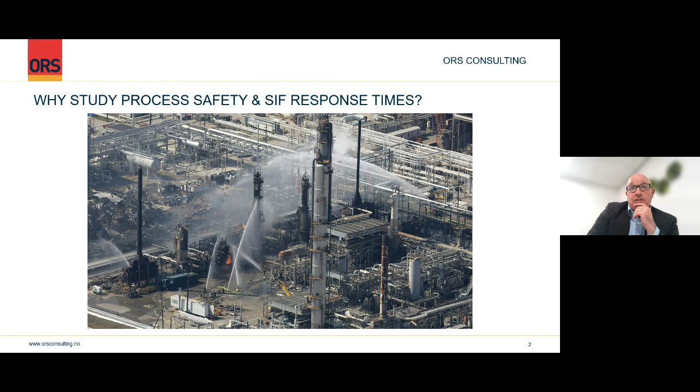They're very complicated. There's lots and lots of different things that happen, very often years before the actual event itself. But at least part of the problem here was there was an issue with the instrumentation, the protective instrumentation that supports those columns. And this is just a schematic representation of one of those distillation columns.

This distillation column's basically got hot vapor being created here in this reboiler. So we get vapor going into the column, and it heads up through the distillation column as a vapor. We've got liquid coming down the column. Sorry, here it's coming here. And there's a condenser here that's condensing some liquid, and the pump's pumping it in. So we've got liquid falling down the column.

And to try and manage the liquid level, we've got a level transmitter here. That's that little LT. And that's trying to tell the operator where the liquid level is sitting. And to try and help with that, there was a high level alarm and a low level alarm on a different device. This was impaired, this wasn't working. And so the operator didn't know where the level was in the column.

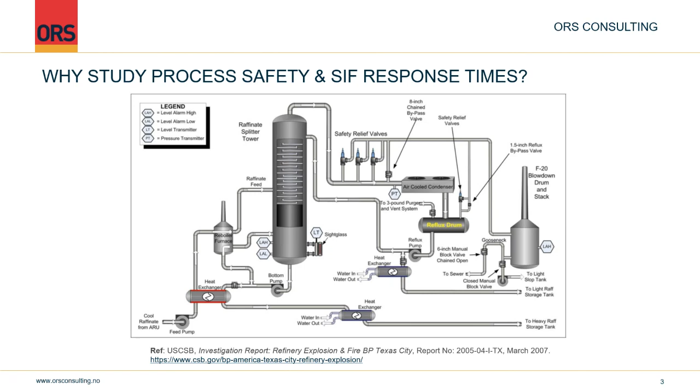This was also not working very well, and they were changing it out prior to the startup, prior to the event happening. And the impairments with these devices, at least in part, meant that the operator did not know where the liquid level was. And so when something else happened during startup, the liquid began to build, and eventually the liquid went right over the top. These relief valves opened, and the liquids were routed to the tall pencil, the big black pencil, and that's where the loss of containment happened.

I got this diagram from the investigation report, and there's also a link there to the CSB site. There's a video, there's the investigation report. There's a lot of extra information there that you could have a read of. I always encourage everybody to have a look at previous events to try and understand them.

So these instrumented systems, and you can see there's a few of them in this plant, and I'm sure in your plants that you're involved with, there's lots of these safety instrumented functions, as they're called. They're protective devices that are trying to stop this liquid overflow. They're trying to stop overpressure. They're trying to stop a low temperature event by detecting it with a transmitter, and then a logic solver trying to get something to take action. So like the pump being switched off, or an isolation valve being closed, or something like that.

And the question we're very often interested in is, how quickly does this equipment need to work? How fast does it need to work? It's obviously no good if the liquid can build in the column over 20 minutes and the fastest that this can all operate is 45 minutes. It'll operate after the hazardous event's occurred. So it's an important question, this. How fast must this equipment respond?

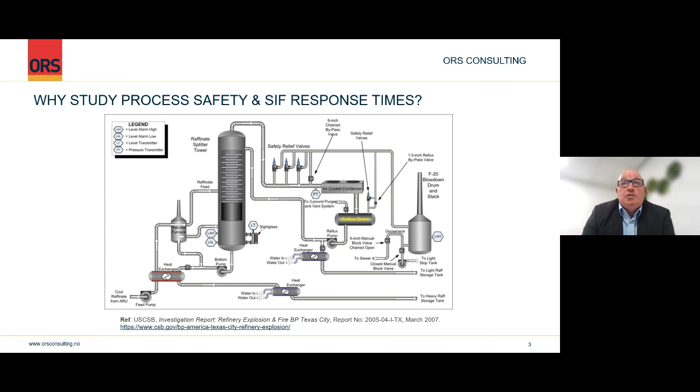Because very often, around most of the plant, those events maybe haven't happened before, and we can't know for sure, is this kit good enough? Will it actually help us in a real event? So that's what I'm going to concentrate on. And you can look at almost any major incident on a complex process plant, and there will have been an instrumentation issue involved somehow. So let's dive straight in. What is the process safety time?

It's defined in international standard IEC 61511, and it's defined like this in red. It's the period of time between a failure occurring in the system, and that failure has to have the potential to give rise to a hazardous situation, and the occurrence of the hazardous event if the SIF is not performed.

Now, as usual with standards, the English that's used in standards can read a little bit like gobbledygook when you first read it. So I'm going to show an example, and let's see if we can just get a common sense definition of that. It's basically the time between an initial failure happening, like a valve failing closed, and the vessel filling up and the liquid overspilling into the next process downstream from the vessel.

Or it would be a valve failing closed, and that would be the failure, and then the pressure building inside the vessel, and eventually the pressure reaching the design pressure. So it's a duration of time between something going wrong in the process and then the design limit being reached. It's as simple as that.

The PST, it's a property of the process, and it's determined by the volume, mass, and energy balance. So it's got nothing to do with instrumentation. It's only a function of how much stuff is going into the vessel or equipment, how big the vessel is, and what its design limit is. Yeah, and I'm going to show that in a real example in a second.

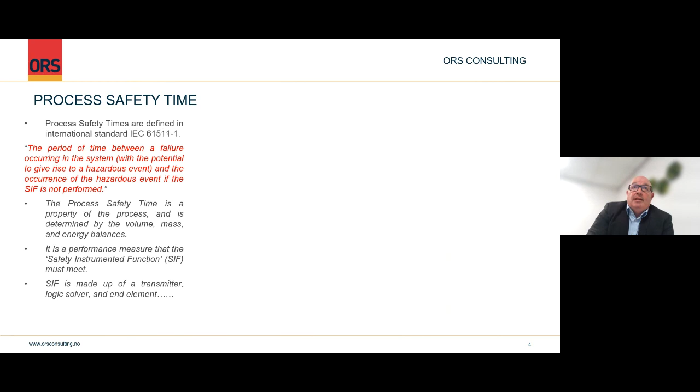This is what I mean by the fact that the process safety times are a function just of the geometry of the equipment and the flow rates and the temperatures and compositions. It's got nothing to do with instruments. It's like once you shut the valve, how big's the vessel, how much stuff's coming in, and that'll determine how quickly it fills up to the top and eventually carries over.

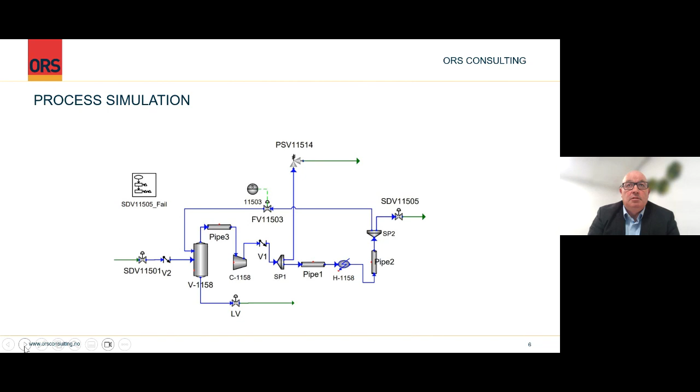I would say maybe 10 to 15% of the time we need a dynamic model. Most of the time we can get a conservative estimate of both the process safety time and the target SIF response time from a hand calc. But it might need something like this. And once we've got our model, whether it's hand calc based or simulation based, then we can start to have a look.

So here's some output from a real study. Thanks to Dario, my colleague Dario Potsa, for doing this for me.

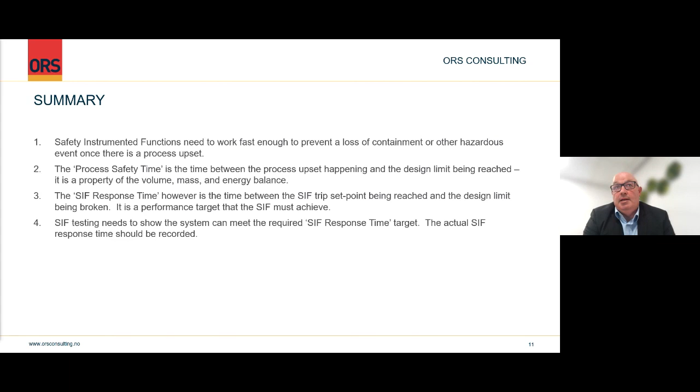So one person asked, is the SIF response time less than the process safety time? I hope you can see from the graphs, yes it is. If I go back over here, yeah, the SIF response time is definitely shorter than the process safety time.

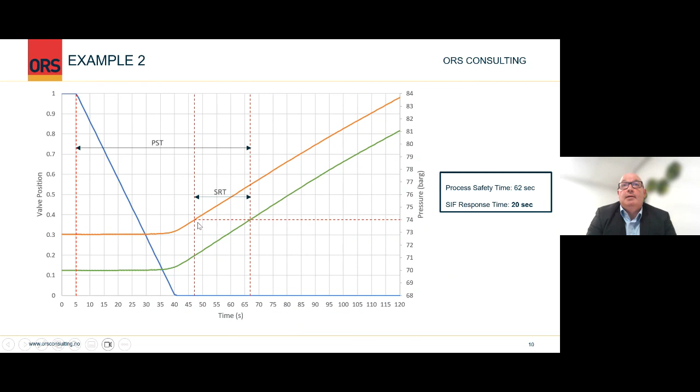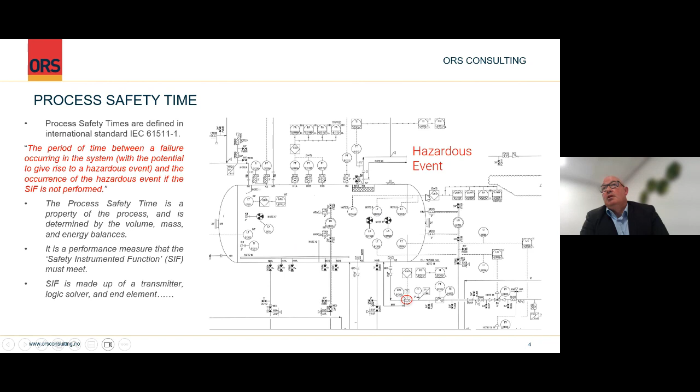Somebody's asking, what's the difference between the SIF and the SIL? Well, SIF stands for the safety instrumented function, and if I flick back a couple, the safety instrumented function is this equipment here. So it's the transmitter, level transmitters, the logic solver, which is the computer controlling the ESD, the emergency system, a computer on the plant. And that computer then talks to what's called the end elements. There's an example end element there, a shutdown valve; the computer would then tell that valve to close.

So a safety instrumented function is made up of 3 elements: transmitters, a computer, and an end element, a valve or a pump or something that can take some action. Those 3 things together form the SIF. The SIL, on the other hand, safety integrity level, is a reliability measure that's trying to tell you how reliable that equipment needs to be in order to work safely. Because of course, sometimes these things can break, the wiring might be affected, the transmitter might blink.

And the SIL is a target reliability that it needs to meet given the type of consequence it's trying to prevent. So if we're trying to prevent a loss of containment where we could get multiple fatalities, we'd obviously want this to be very reliable. It might have a very high SIL rating, a SIL 3 requirement, say, and that corresponds to a very highly reliable system, like 0.0001 failures, 1 failure in 10,000 or 100,000 or something like that, just as an example. So I hope that answers that question.

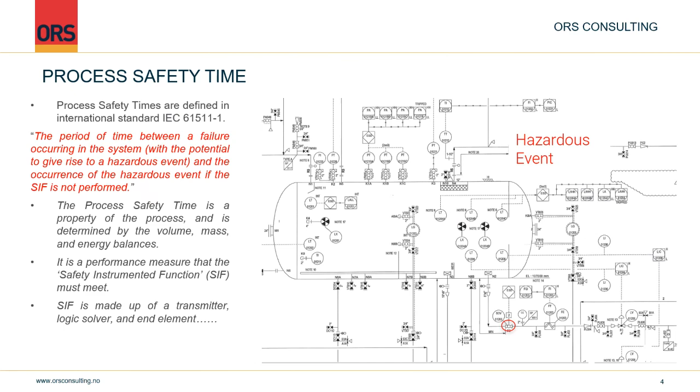Let me keep going. Someone's asking, can we say that the PST is approximately 1.5 to 2 times the SIF response time? This is a great question, it comes up a lot, and there's a lot of confusion about this. Let me go to a good slide for that, so we can answer that. Yeah, there we go. Right.

So this is something that comes up a lot. Should the target SIF response time be half the process safety time? And in fact, not just the target SIF response time, but the actual SIF response time, so how quickly it really does respond. That's a different idea again. And I would say that's approximately right in practice, the sort of 1.5 to 2 times.

That's approximately right, and it is a rule of thumb that people use in the design community when they don't have any set points for the system set, but they do know this. They know that if the failure occurs, when is the design limit breached? So they know the process safety time, and it's a general rule of thumb to say, well, just half it. Let's put the set point where it's roughly 50% of the process safety time. But it's a rule of thumb, and it's to help you try and set safe set points for the SIF, so that it operates roughly twice as fast as it needs to.

But you can see even in this example, for sure we should be focusing on this. Whatever this really is, the target, that is what we should be concentrating on trying to work out, and we should be testing against that. I think, unfortunately, this sometimes gets called the process safety time. Some people refer to this time as the process safety time, the time between the set point and the design limit being reached. It's not correct as per the standard. The standard says the process safety time is this, but we're obviously just very interested in that.

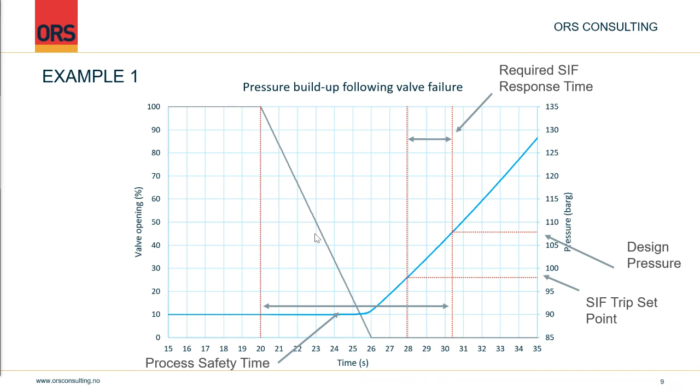Okay, why is there such a long delay from the pressure build up? That's a good question. The valve's starting to close there, so why does the pressure not build when the valve starts to close? Well, that's just down to the hydraulics. As long as there's some cross-sectional area, the flow is going to continue. We've got pressure upstream of the valve, we've got pressure downstream of the valve, and obviously the velocity is going to change, but the pressure gradient across the valve doesn't. Downstream pressure is not really changing, the upstream pressure is not really changing.

But as the valve starts to shut, the cross-section area gets smaller and smaller. The actual velocity through the valve is getting faster as it closes, but the pressure upstream of the valve does not. It's only once we get down into this low part here, where we've got very little of the valve left, a tiny hole left, that the pressure has to start to build, and we can't get rid of it anymore. So that's why that happens.

Next one, someone's asking, oh, hang on, I'll try and publish this one. Some people have asked a few similar questions. Well, I'll go back to these other two first.

Would you say the process safety time is defined in the design phase for selection of alarm and trip set points, or selection of operational parameters such as flow, heating, or maybe both? Great question. Yes, it's much more useful at design stage. We might not have the alarm set point or the trip set point in place yet, but we know the blue line and we know the process safety time. So we can make sensible decisions about the alarm set points to make sure we're within the process safety time first. Then we can stretch this red line back a bit or tighten it up. If we tighten it up, it gives the process more flexibility to operate without trips.

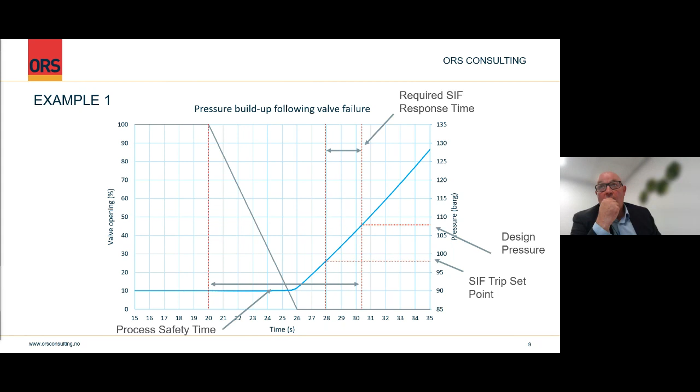That rate of change when calculating the process safety time. The rate of change is sometimes a different performance measure that's used for instrumented systems, because this is very fast. Instead of the executive action working where the trip set point's reached, the transmitter picks it up, the logic solver gets it, based on a straight value, there's a different way of asking the valve to close, and that's to look at the gradient of the blue line. That gradient's the rate of change talked about in the question.

And if we can measure the gradient, if it becomes too steep, even before it reaches the absolute trip set point, in a way it's like a warning that says there's a problem here. This gradient's so steep.

If we wait till the trip set point's reached, we're not going to be able to meet the SIF response time. So it's a second way, like a second layer of protection, if I can call it that. Although it's just the computer. It's actually something happening in the logic solver. The transmitter, the logic solver, and the valve are the same. It's just the computer doing something fancy with a gradient in the line as a second trip, if you like.

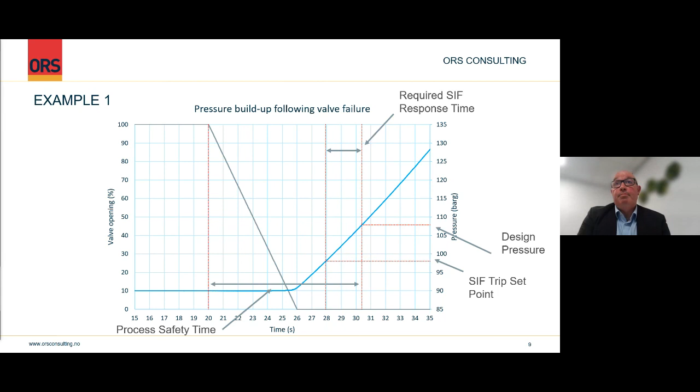Someone else asking, for a small process safety time or SIF response time, what further protection layers exist? Well, that rate of change was one, and that's in the logic solver, so that's one example of it. The other layers that can exist, let me just flip back a couple of slides.

So obviously the alarm and the operator response, that is a layer of protection, but not always a very reliable one, especially in a stressful situation. But it can also be quite good. In my experience, it very much depends on the person, the operator, and how complex the plant is. So it just depends. You could have a second device, and beyond the instrument device working, we might have another layer like a PSV or something else like that.

Someone just asking, last couple of minutes before we're out of time: should the SIF response time be determined before LOPA? Where is it normally included, the results of those calculations? Calculation reports or LOPA reports? That is a good question, a very good question.

I would like to see it calculated before LOPA more often than it is, because especially for existing devices, and even during the design process, it would be better to have it before the LOPA, because at least you could tell whether or not it was realistic that an instrumented function could provide protection in that circumstance. If the SIF response time is, like that example I showed, 2 and a bit seconds, can we really say we're going to get a SIF that can react that quickly? Maybe, but maybe not, and maybe LOPA is not appropriate then because of that. So I would like to see it before the LOPA.